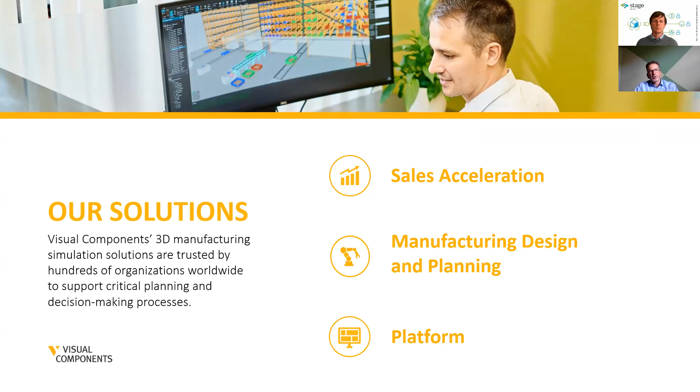So for what kind of requests is Visual Components the best solution? First, because Visual Components is very easy to use, it's good for sales acceleration. With Visual Components, the user has the ability to create 3D layouts in a very short time frame, and iterations of changes are also very fast, so the user can provide new layouts quickly. This is more from the sales perspective.

The other perspective is if you want to expand - what was the right word?

If you want to make your own process more productive, you can use Visual Components for your manufacturing design and planning. And the last thing is the platform. Because Visual Components is a very open platform, a very open solution, you can create your own OEM version, like KukaSim, FlexLink, or Delfoi. The platform is Visual Components, and then they make their own solution on top of it, so you can use it as an OEM version.

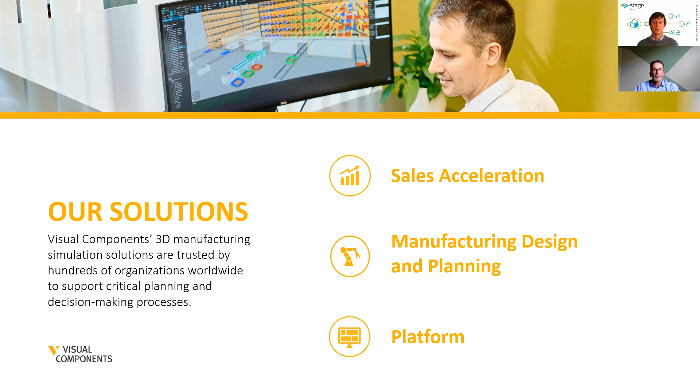Just two customers which are using Visual Components. This is just two references out of hundreds of companies which are using Visual Components. So AGCO Fendt is one of our customers who's using Visual Components for improving their own production.

AGCO Fendt was acquired by AGCO, and so it becomes an agricultural equipment company. Formerly, they just manufactured tractors, and now they manufacture all components, all parts for agricultural equipment and so on. AGCO has more than 40 plants around the world, and we currently start with the Fendt headquarter in Germany, which supports 7 plants in Germany, and they want to improve and innovate their production and optimize their production workflow.

They have also internal projects, like the motor hood you see here from this tractor. It's currently sheet metal, and they want to change it to plastic. This is a totally different production workflow from a sheet metal motor hood to a plastic motor hood, and therefore they're using Visual Components to simulate the production first, and then bring it into the real world, so they can see the failures or mistakes they will make, and then analyze the material flow and the production first in Visual Components.

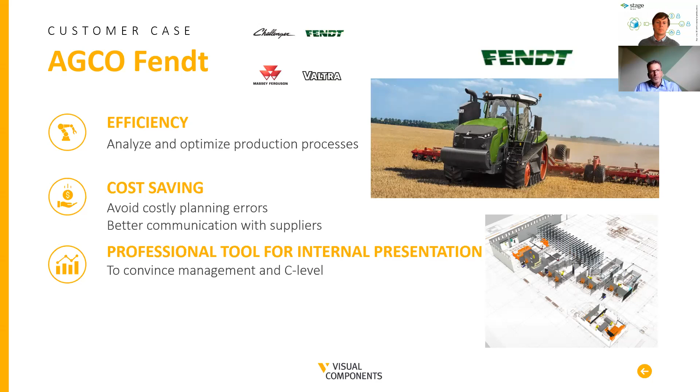So they save costs, and what they tell us is also that the communication with the suppliers is better than before. Before, they exchanged 2D drawings, and there were some mistakes in it, and the suppliers couldn't interpret the right thing. So with 3D, the communication is much better.

The next one is Grenzebach. It's a different case because Grenzebach is using Visual Components for sales. And this is what we'll talk about, and what is our topic today - how to improve sales with Visual Components and VR on Stage. Grenzebach uses Visual Components for large plants for glass production, and they include the customer in a very early phase in the discussion together, how this plant might be, how the whole process might be.

And they do everything in virtual reality. In this case, the customer has to visit Grenzebach in Asbach-Bäumenheim in Germany to see all this, so the customer comes to Grenzebach and has a look at the whole plant.

In this example, Grenzebach simulated a 140-meter long glass production line with Visual Components, invited the customer, found some things they had to eliminate, what to change, and found the mistakes in a very early phase, before it's really built on the customer side.

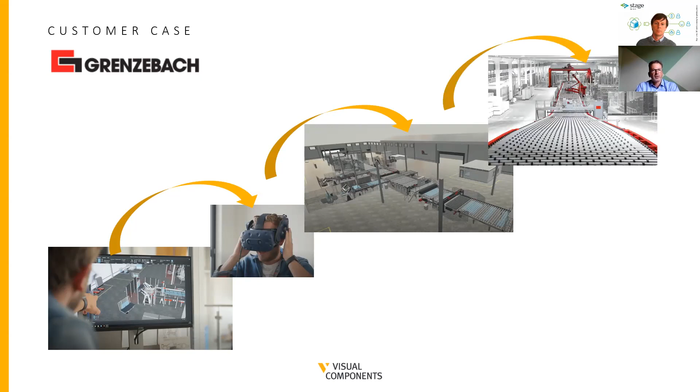So again here, the efficiency is really a fast and accurate layout design. In a very early stage of the sales process, they save costs, and it's a sales tool where they can make precise quotations from the beginning of the sales process, sell more, and win more bids in this case.

So yeah, this is what Visual Components is doing - just two customers which are using Visual Components in a highly effective way. I think Matthias can take over again to tell something about VR on and the appropriate challenges.

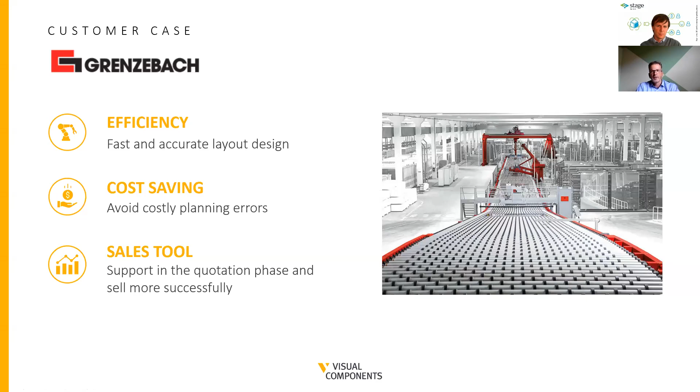Thanks, Marcus. So yes, I will take over again, and let's talk a little bit about Stage. What is Stage about? Stage is a tool like Zoom - it's for conferencing. Our idea is to be the Zoom for 3D content. That means we enable 3D content providers to use their content inside a conferencing environment.

For example, we support CAD tools like Autodesk Inventor or other tools from PTC, Siemens, Dassault, SolidWorks, CATIA, stuff like that. We have the direct connection that we show today to the simulation solution of Visual Components. The specialty is that we do real streaming, live streaming into the session. But we also provide SDKs for Unity and Unreal, so everybody who wants high-end visualization for marketing purposes or wants to build a training application can do this with these SDKs and use it all together with our cloud platform, Stage.

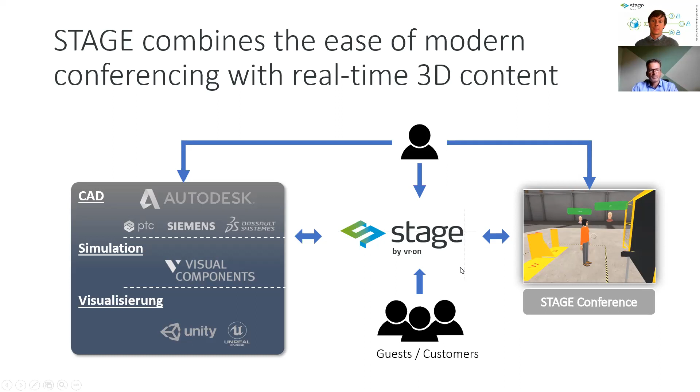Some words about what conferencing is. How do we understand conferencing?

Often people are talking about collaboration. From our point of view, collaboration is a content creation process. That means people work online together, asynchronously. They don't have to work at the same time with the same object, and they create something, a deliverable that they want to use afterwards in the process.

In a conference, people are meeting in real time, sometimes physically, sometimes virtually. They want to discuss something with the team. So there is already some content that needs to be discussed, and people want to explore content and make decisions. So conferencing is a decision-making tool.

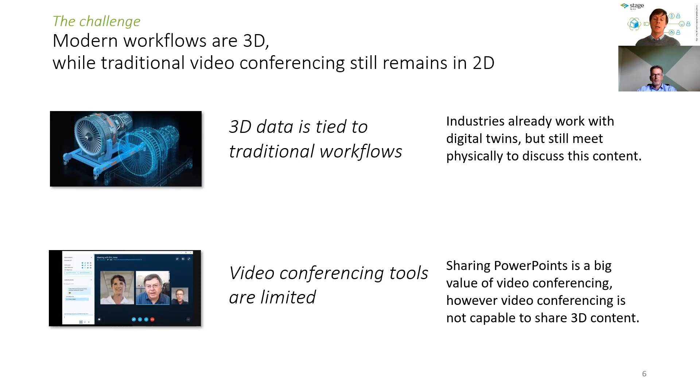The challenge that we have today with video conferencing, such as Zoom or Teams, is that it doesn't work really well with 3D data. So 3D data is still tied to traditional workflows, which means people often meet physically. Sometimes they do printouts, sometimes they build wooden prototypes to explain something, but they don't use their 3D data in this meeting. Especially in video conferencing, it becomes very complicated. It's easy because it's a tool made to share the screen, so it's good for PowerPoints and Excel, but as soon as it comes to 3D data, there are different challenges.

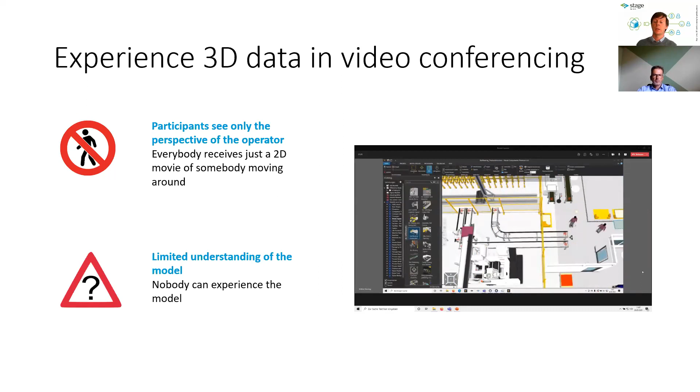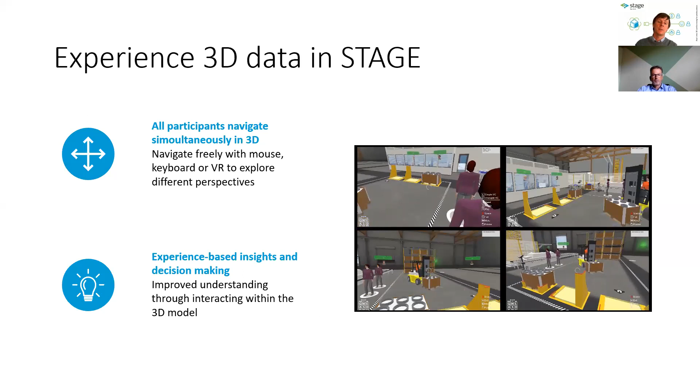If you look at the same situation in Stage, here you see 4 participants in a Stage meeting. Every participant has their own view. They can move around a little bit. In the upper left screen, you see a head movement as well of one of the persons looking from a different perspective, and you also see the other persons inside the 3D space represented as avatars. You really get a better understanding because you're part of what is happening. You can move around, take different perspectives, and are totally free in exploring the model itself.

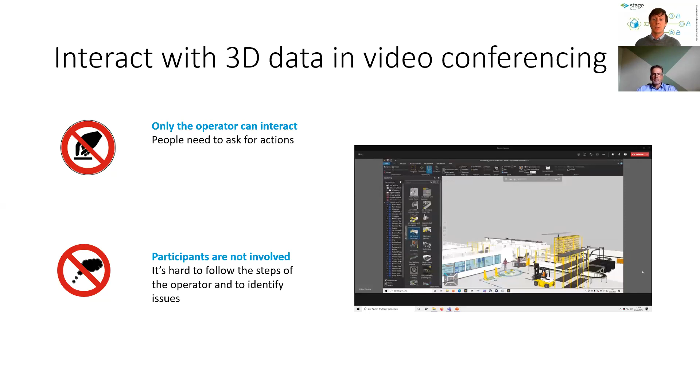If it comes to interaction, again in Teams you have the problem that one person is doing something, and only one person can interact with the model. That means if you want to do something special or see something from another perspective, highlight something, you need to ask the operator to do that - you cannot do it on your own. So people are not really involved. Sometimes they also get bored, sometimes they don't understand what's happening, and you just don't catch them inside such a meeting.

If you look again at Stage, here you see 2 participants interacting with each other. One person is pointing at a certain line, and the other person is measuring the distance from the yellow plate to this line to understand what distance that will be - can we move it maybe a little bit forward, how much space do we win, something like that. People are talking to each other inside the meeting. So there's voice chat, there's pointers, and we do have these dedicated 3D tools such as the measurement tool.

At the very end, it means people can work much faster. They have a deep understanding of the data, and they can also identify errors in the planning and talk fast and change these errors directly.

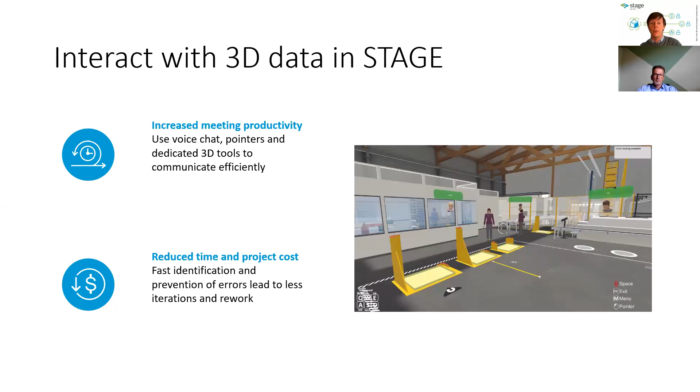Also, Stage does support local rendering. That's something, unfortunately, you will also see on our demo later because we do here a Zoom screen sharing - there is of course a latency in the transmission. So when we share our screen, you will see some latency in the movement, some hiccups there, which is not nice. That doesn't happen in a Stage meeting because everybody gets local rendering on their local machine. And also, due to this local rendering, if you have the right machine and equipment, you can also enter a meeting with an XR headset and get the full one-to-one scale experience of the 3D model.

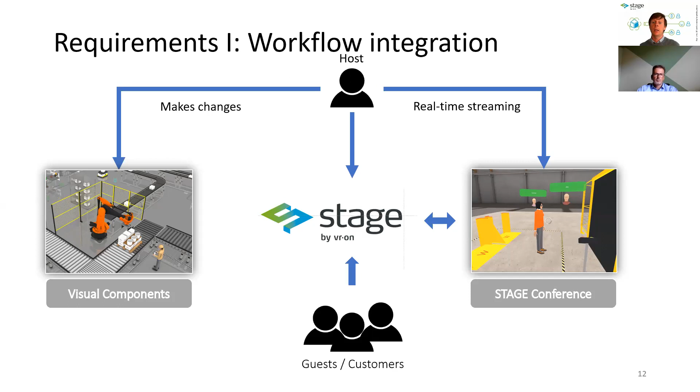So, of course, we do have some requirements for such a meeting. First, we need a full integration - that is something we do have with Visual Components. That means you start Visual Components as software, then you start a conferencing session in Stage, and you just connect the software behind the Visual Components software with Stage, and everything happening in the Visual Components software is streamed live to the meeting.

And of course, there's another requirement: the whole meeting needs to be accessible. A lot of people today do conferences or VR, XR conferencing, and as a prerequisite, you need PC-based VR or sometimes standalone VR headsets. But the truth is, especially in the sales process, when you talk with your customer, the customer often doesn't have special equipment. So it's very important and possible with Stage that you enter a meeting just with your standard hardware, such as a business laptop, to follow a meeting.

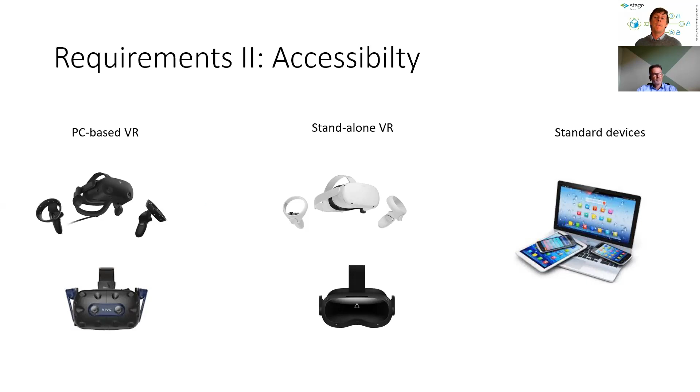Some words about the features of Stage. Of course, we have some standard features all over our product portfolio: personal avatars, voice chat, a pointing ray, but also 3D navigation.

We can choose between different environments. We have a bird's eye view - if you have, for example, a large manufacturing layout which is hard to overview from the floor level, you just move upwards like 10 to 15 meters and have a bird's view to look around. You can adjust your personal height, especially if you want to understand ergonomics. You can choose, for example, a height of 1.60 meters or 2.10 meters to understand what different persons at different heights can see.

Then we have some tools. We can do screenshots with a camera. You can do measurements. You can slice objects to look inside to understand this a little bit better.

And especially with Visual Components, of course, we have this streaming connection. So all changes are live streamed, but also you can start, pause, and resume the simulation directly from the conference. So you don't have to switch all the time.

The service infrastructure behind our service is scalable cloud on AWS. We have a full user management and a meeting invitation service behind. And of course, we take care about security, and the full service is GDPR compliant.

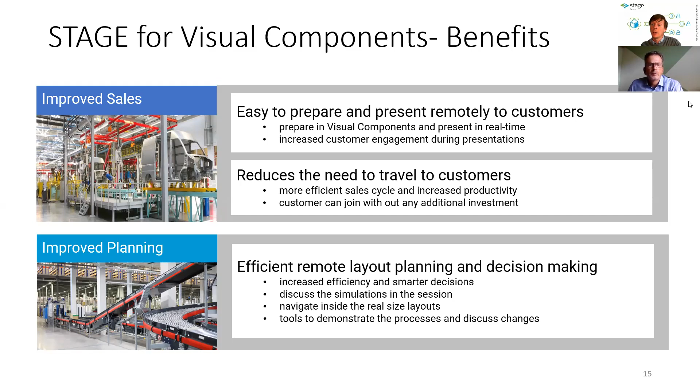In planning, of course, there's also a lot of beneficial things, especially when people do VR, because they have the VR headsets ready. They can talk about ergonomics, try things, understand things more in depth, and discuss with global teams really fast how the next manufacturing layout should look like. So I will hand over back to Markus now and give you the chance to have a look at our live demo.

Yeah, thank you, Matthias. So I will take over and share my screen again. Can you see my screen again? Full screen? All good, all good.

Perfect. So let me give you a short introduction - what is Visual Components? I prepared something here, and I will finish it up in a few minutes, so that we can create a workflow with a robot maybe, and machine tending, and also a manual process.

And this library is supported by our colleagues in Finland. Every time when a new library part is available and the user is connected to the internet, the user gets the new library part, and it's also available for offline usage. So all the parts are on your desktop computer or laptop computer, and you can take it with you.

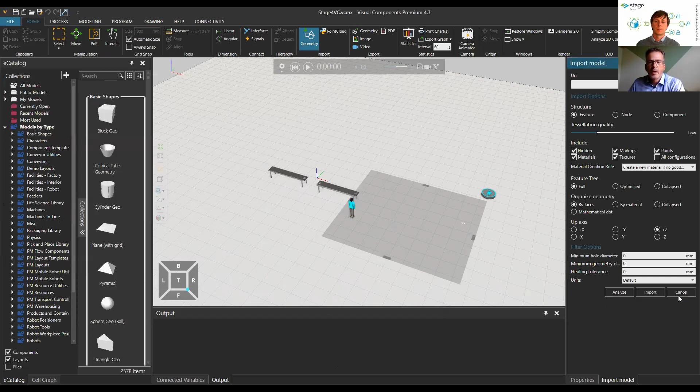So, how does Visual Components work? How can we work with this? Let me finish this small layout. We are working with a drag and drop functionality.

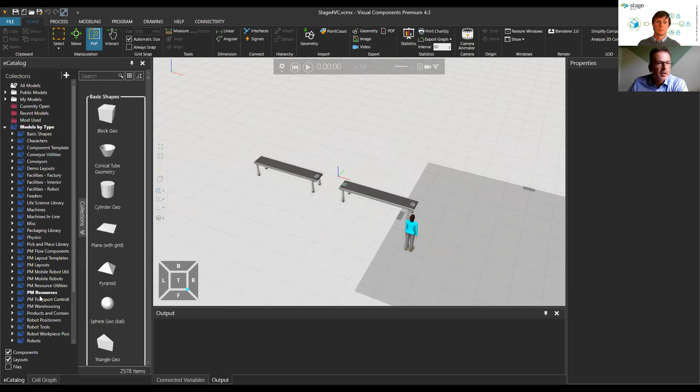Maybe I finish this layout and I need a robot pedestal here. I put it in the layout. You can see I simply drag and drop it here.

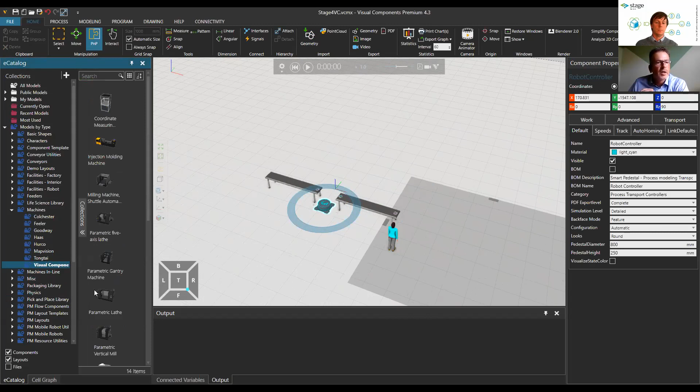Then we have machines. These parts in the blue folder are already prepared for simulation. They have some information in them that you can use for simulation. A very big portion of our library parts are the robots. We have more than 1,500 robots in our library.

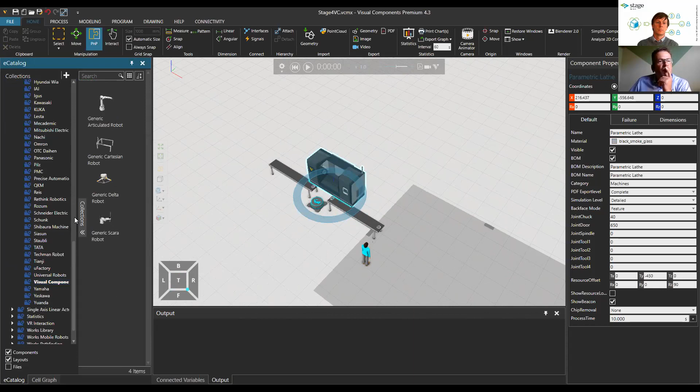So from ABB, I can scroll it down to Yaskawa. Name and no-name robots are in our library, so you will find every robot in our library, and also Visual Components robots. These are generic robots, which you can use for conceptual studies.

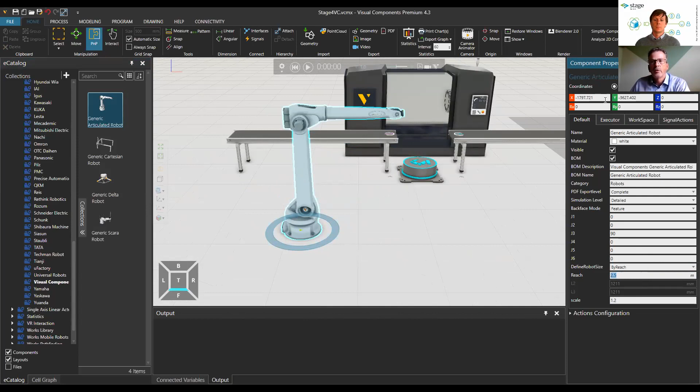Because this 6-axis robot is parametric, you can change the height and the size and so on, and use it for conceptual design or conceptual studies. Maybe you need a robot which has a reach of 2 meters 50, so you type that in here in the properties.

You can also see that the robot connects to the pedestal, and it jumps right here. You can simply click it or drag and drop it to this pedestal, and they know each other.

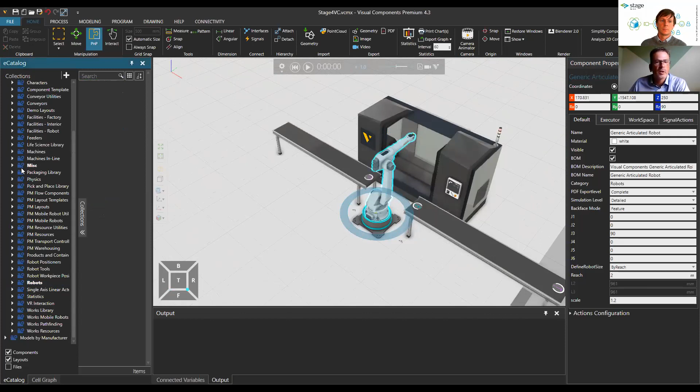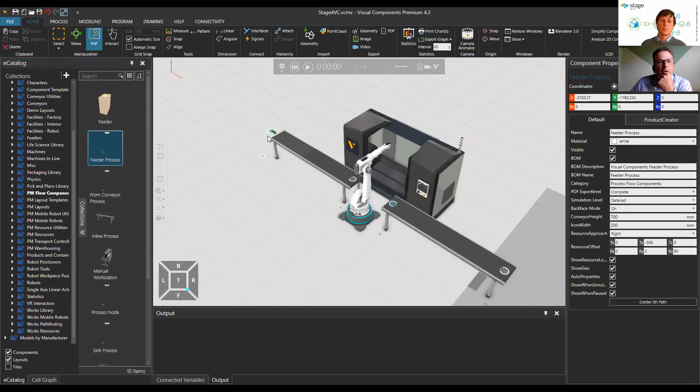So the next thing I want to use is the machine, and then I need a feeder. Not this one, it's in Flow Components, here. I need a feeder, and then I connect it to the conveyor, and you can see it snaps directly to the conveyor.

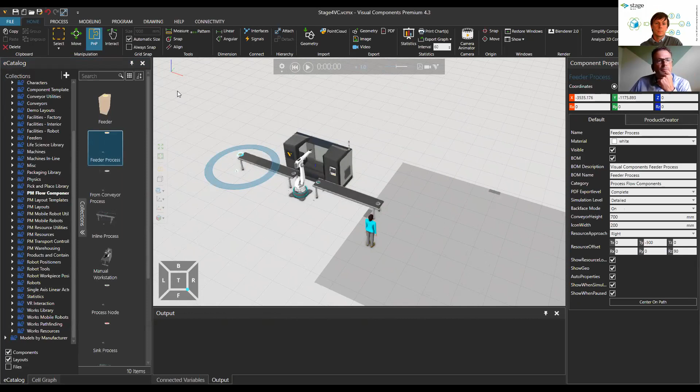It knows the feeder has to feed onto this conveyor. So now I have finished my layout with the drag and drop functionality, and now I create the material flow using these 3 buttons here.

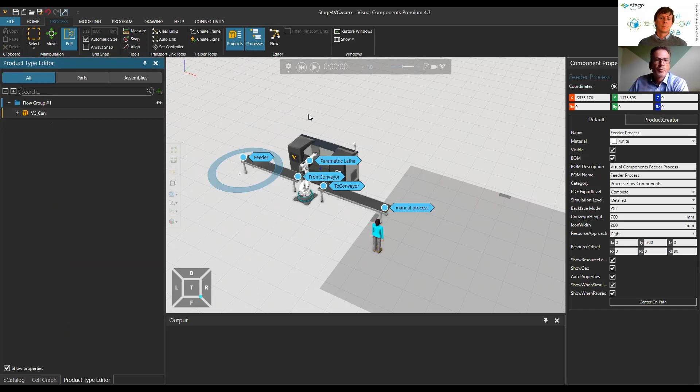So the product, it's simply, for this example, a VC can, a Visual Components can, and then I have here the processes. I can change the process. Now behind every process there's a kind of storybook, which can be expanded or created by your own.

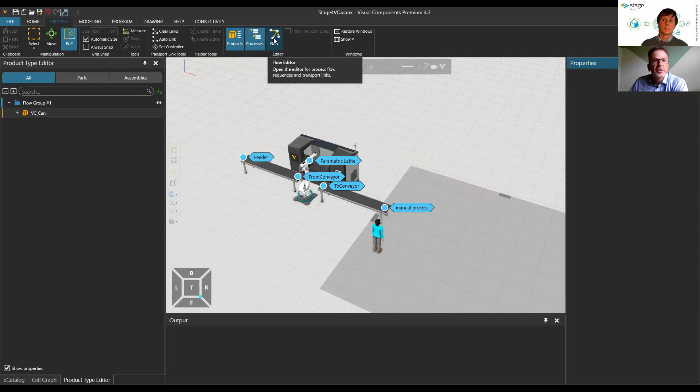You can create and change it here. With this flow environment, you create the material flow, and this is very simple. You can see here that there's a process flow editor, and this is empty now, and this regards to the VC can. Now I start to set up my material flow.

Now from the feeder, it goes over the conveyor. You can see also the resource, the conveyor, is used to transport the product.

Then I activate the robot, and the robot should bring it to the machine. After the machine process is finished, it should take it back on the conveyor. Then afterwards it should be transported by the conveyor.

Then my worker should take it and bring it here to the end of the line. So I create this, and you can see it's a manual process, and my worker takes it and brings it there. After that, I can start the simulation.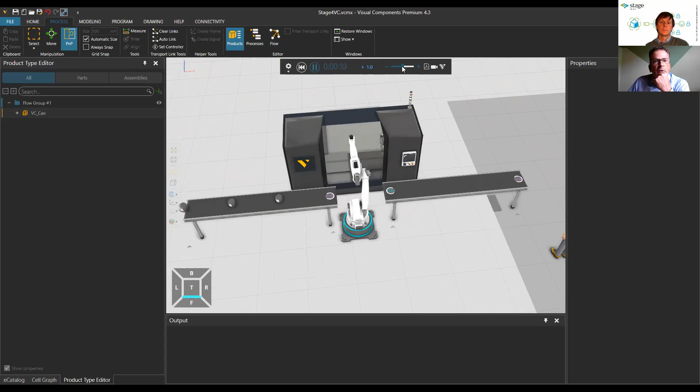Let's do it here. I press the play button, and you can see that in a specific time frame, which I can change, the cans run over the conveyor belt, and the machine is doing its job.

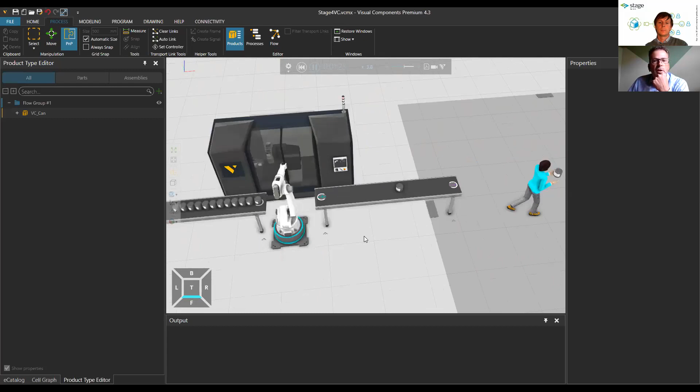Now you can see in the early phase that my material flow from the feeder is too fast, and I get my bottleneck here from this conveyor, and my worker has a long way to go.

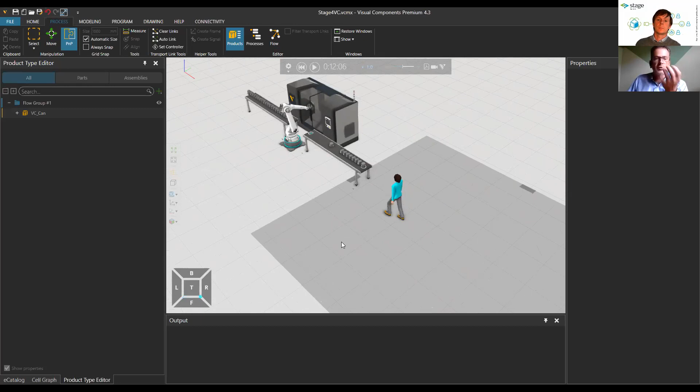Maybe if we make it a little faster, you can see that after some time you also have a bottleneck with your worker, and then you can make the decision to maybe use 2 workers and so on, and analyze your layout. So this is what we can also do, making statistics out of it.

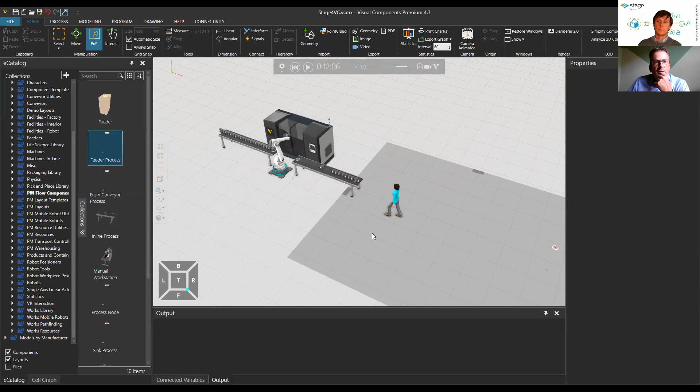So Matthias, let's jump into stage and see what happens in stage.

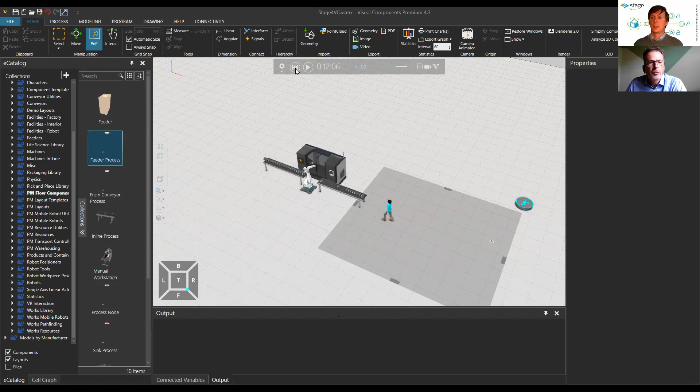The host from stage gets this window, and what I have to do is simply click here. We only see Visual Components at the moment, so just a second, I have to share my screen, not the program.

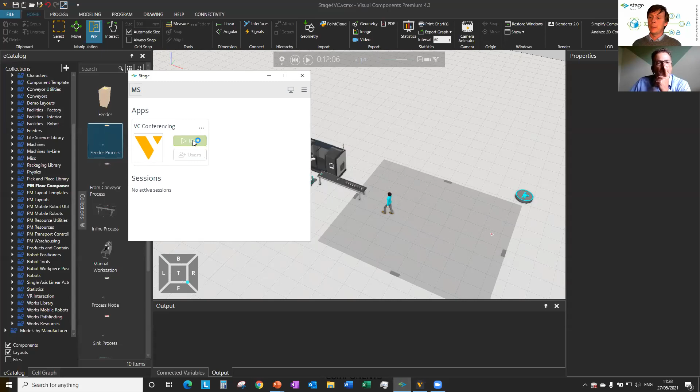Now you should see. Can you see also the stage, the stage client? Yeah, I can also take over and explain a little bit here. So what Marcus is doing now, he's first hosting a conference, and as soon as he hosts it, I will be able to join from my side, which I will do, and we will both meet each other in a virtual meeting. So I'm joining now. I see Marcus's meeting just starting.

It takes a moment until my business PC also is inside the meeting. Meanwhile, what you see here is a layout, just a large environment. You can switch between layouts, you could also use other layouts. And what's also important, if Marcus, if you press M one time and go to audio, you could enable external audio just to make sure that we don't get any interferences.

Let me see, I think my screen to my PC is a little bit slow because I'm recording at the same time. Maybe I should choose just another PC over here to enter the meeting. Just a second, I have another one, and I'm just joining that one.

So here I've joined with an avatar called Hannah. Hannah is also joining the meeting, and we're now connected here. And also now my user Matthias is joining as well. This took a while, probably because of the rendering of the video at the same time, the video recording of the Zoom meeting.

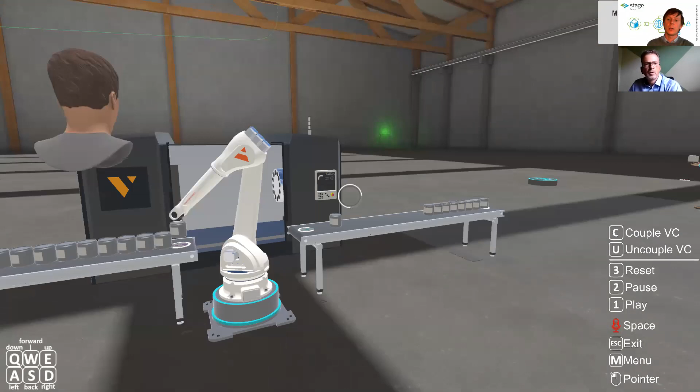Maybe Marcus can show it. You can really also look inside the machinery to get a better understanding of what's happening inside. This is also possible because you can just move through all the data. And we also could now start to discuss things.

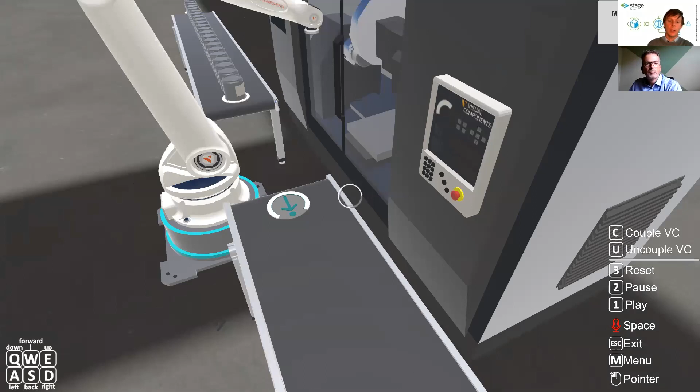For example, if I look down here, Anna is taking the little glasses and brings them to nowhere. Maybe we need something like a shelf. Could you maybe just put a shelf inside here? Yeah, sure I can.

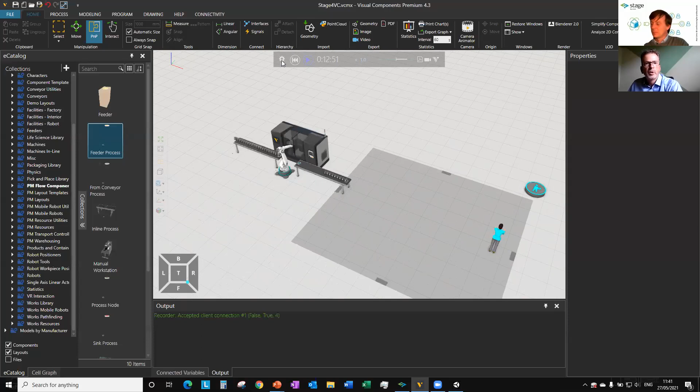So I pause, then I switch to visual components. Maybe I put it back, and then okay, good. You want to have a shelf buffer, I can put it here. So this is my shelf buffer.

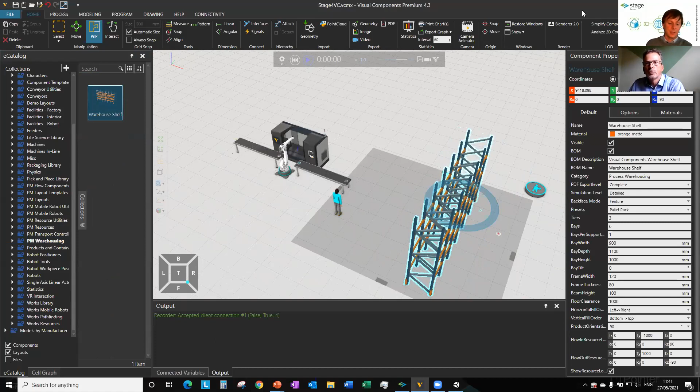I assume you already see it in. I do see it. No, just a second, I have to, maybe I reduce it. Yeah, you can see it's already there in stage. So I don't want to have a pallet rack, I want to have a manual picking. So I change it, and it automatically changes in stage.

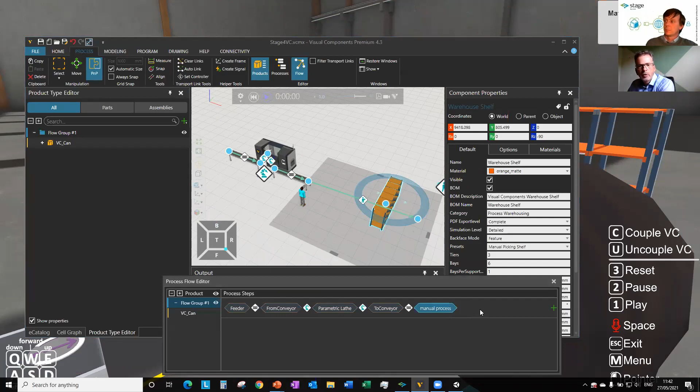So what I have to do now is to change the process, because Anna brings it to the shelf. So I change the flow. Let's put it here, right from the sink. We change this and make a new flow. So from here to the shelf, and then it goes out to the sink.

Maybe we make here in the sink, a little delay. This is what I tell you, you can also create your own statements, or configure what happens there. So now I say there should be a delay of maybe 10 seconds, and then there's a request from the shelf, or maybe 20 seconds. Something is happening. Okay, great, so let's see what happens.

I can start also the simulation here in Visual Components, not only in stage. But let's see what happens in stage.

Okay, maybe as we are running a little bit out of time, let me have a look here. So you put the shelves there, and I also did a measurement because I wanted to understand how far away it is. So it's about 4.30 meters away from the conveyor.

And also what I could do now is just to get an idea of how it looks inside the machinery, for example. I could just do a cutting plane, put a cutting plane in here, do some slicing. I turn it around so that Marcus can see it as well. So slice the whole object and look inside the machinery as well.